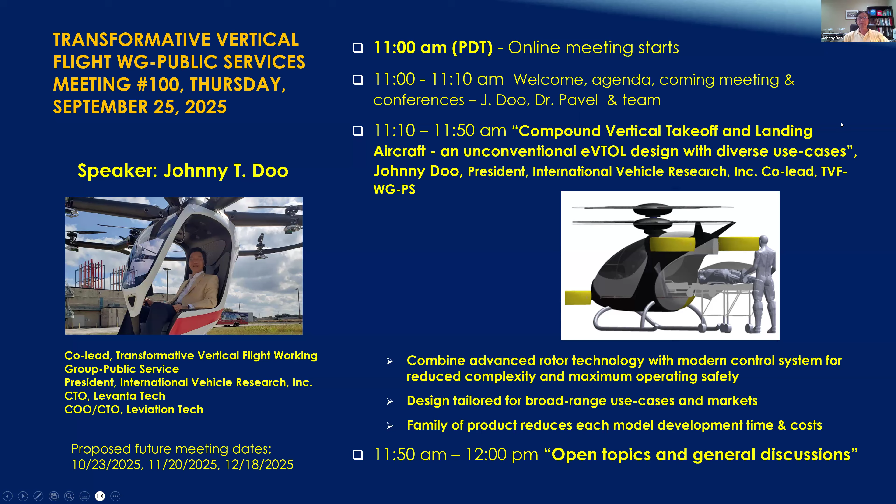There's an Asian Australian Rotorcraft Forum in India coming in November. We have the Vertical Flight Structure and Survivability Technical Meeting, which is a virtual meeting on October 21st and 22nd. There's European Rotors in Cologne, Germany, November 17th to 20th. And of course AirTech, some of you have probably been there, it's in Germany, October 22nd and 24th. There's another one in December in Thailand, the Third International Conference on Advanced Air Mobility Systems.

The important one, make sure everybody puts this on their calendar and makes travel plans: the Transformative Vertical Flight 2026 in San Jose, coming up January 27 to 29, 2026. And I think we have another meeting.

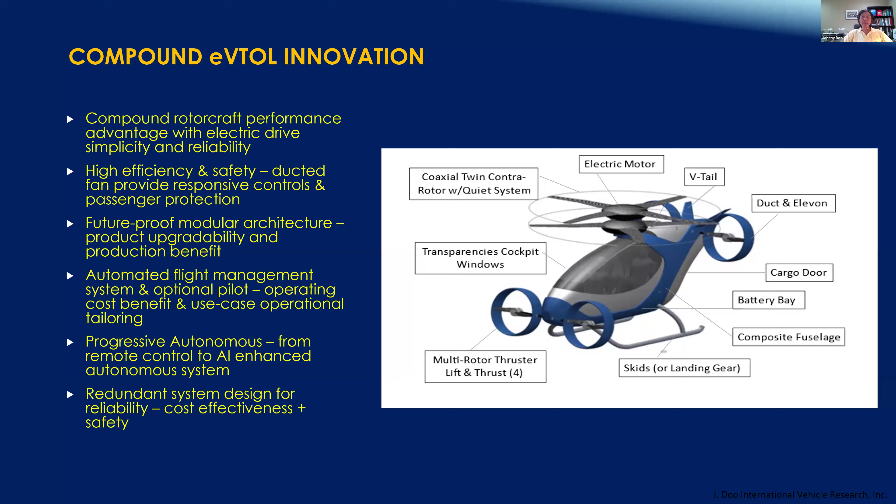I'm not going to read through all the details, but overall, the main rotor is not that big in diameter. There's a reason for it: transportability for missions like first response and disaster relief.

We liked it, for the two-seater version, to be able to shove into a cargo container, ship it anywhere, put it out and fly away. Because of the size limitation, the design can also be put on a trailer and towed wherever we need to deploy it. That's one reason for the smaller main rotor diameter.

We also use a bigger chord, so we're able to generate the lift we need at a lower tip Mach number, controlling overall airborne noise, which in some operations is noise-sensitive and critically important. So it's a balancing act in the design.

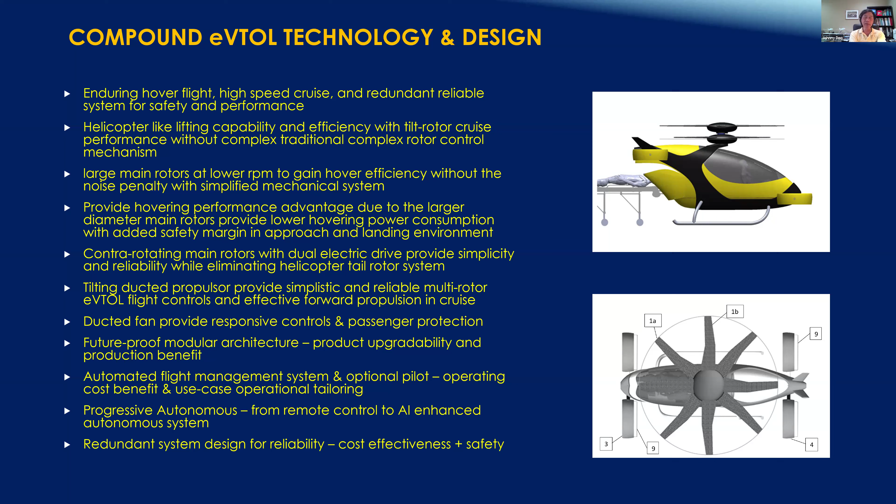I wouldn't say this is the perfect design, because all design involves trade-offs, but it's trying to tailor for better hovering capability and efficiency. For missions where we need to hover to pick up people in water, this may be a bit better. It's definitely not as good a hovering machine as a traditional helicopter—I'll never claim that—but it's in between in functionality and capability. For certain use cases, this may be a viable configuration.

Of course, we try not to design just one. We've laid out plans for at least 3 different sizes. Using seating capacity as equivalent, it's a 2-seater, 4-seater, and 6-seater, leveraging similar technology, concept, and systems. Hopefully the flight control technology developed for the 2-seater will carry over to the 4 and 6-seater with limited modifications.

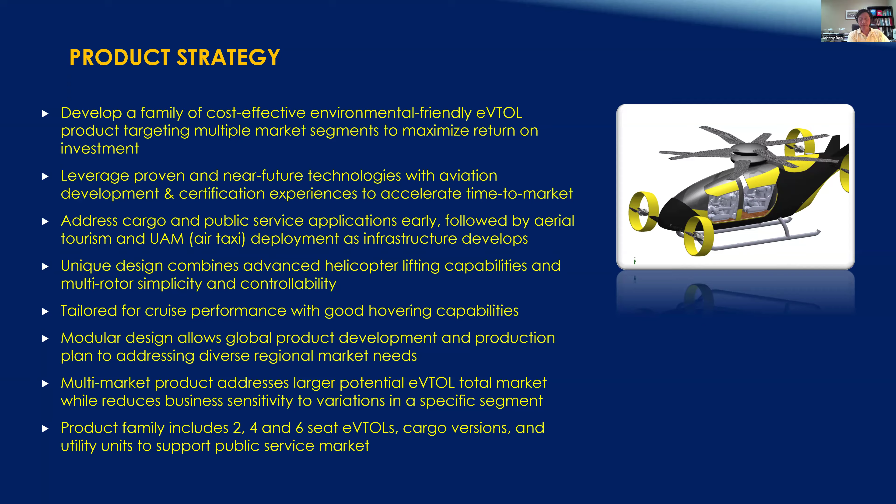And it took a while, but finally got the patent approved by the U.S. Patent Office. That was a learning experience for sure.

Some of the features we try to incorporate into the design, we think it's kind of important: it's a multi-purpose vehicle. It can be passenger carrying, air ambulance, firefighting, cargo transport, tourism. We think if we incorporate those capabilities early stage, we're able to respond to the market demand properly.

And it is environmental friendly. It's designed to be all electric battery. The battery is at the bottom of the fuselage. Actually, there's intended to be a layer of stainless steel sheet at the bottom between the battery and the passenger cabin, kind of borrowing the concept of a standard firewall design on the aircraft certification aspect.

And the battery is removable, modular, removable. Doesn't mean we have to do that every flight, but in case of an emergency response out there in the disaster field, removable battery, even though it adds some weight, makes service maintenance easier, and we can pull it out, charge it up on site, and shove in new ones, so the turnaround time can be a lot faster. So that's a trade-off in weight, a little bit of complexity, and turnaround rate.

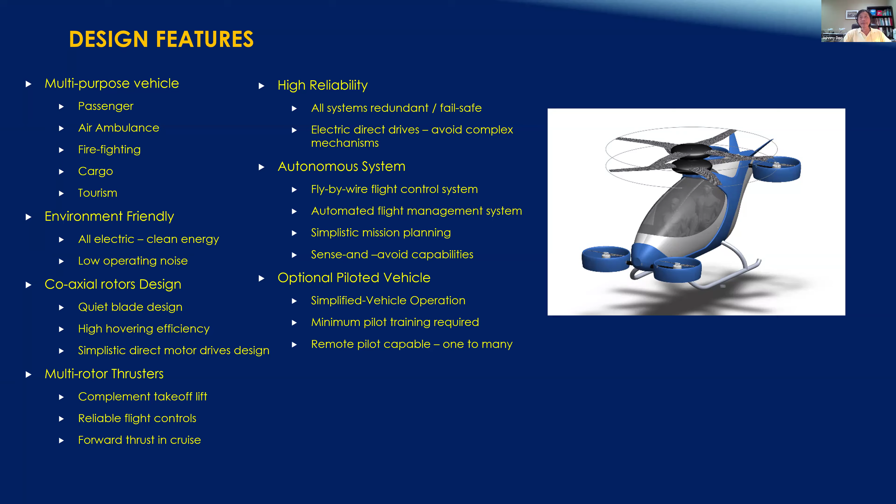But if you look at the size of the vehicle, it's intentionally made compact so it can get in and out within urban streets, landing in a 4-lane intersection, whatever. If we have a problem that needs to get people to the hospital, we can land in small openings and pick up a firefighter, retrieve them to a safe zone. So we think there's some benefit if we can keep the overall operating size small and compact, making it more transportable and deployable.

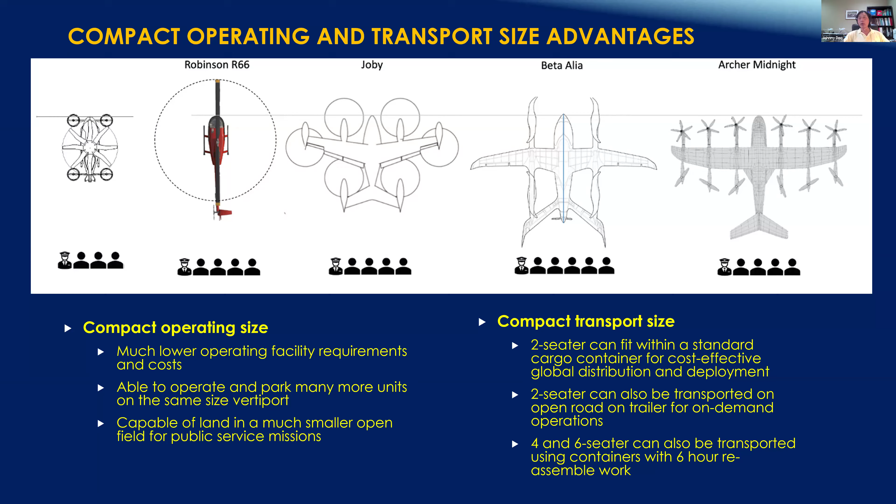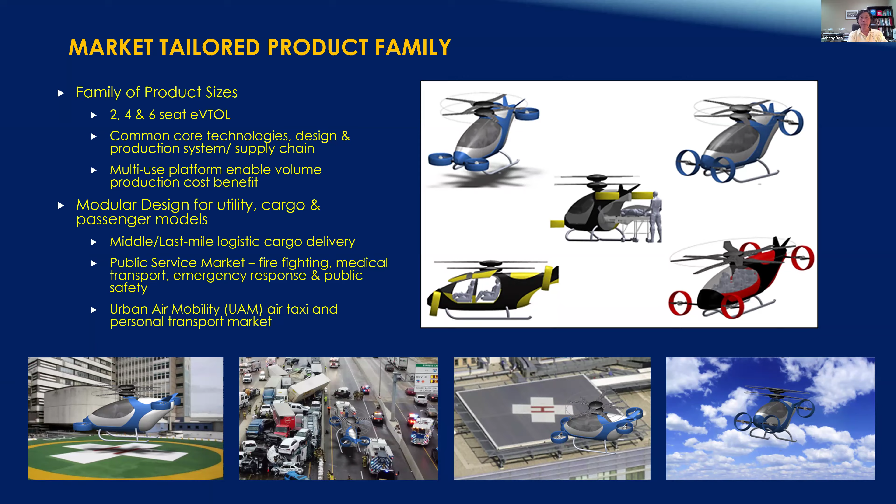And as I mentioned, we try to make it able to accommodate different missions. Obviously carrying people goes without saying, but it can also carry a medical transport patient, or land on the side of the road at a traffic accident so somebody can get to the hospital or care center as soon as possible. It's not big enough, especially the 2 or 4-seater, to perform the same medical transport as some fully equipped medical helicopters. It's not intended to replace those, but rather to fill a short-range, on-demand, quick response time type of mission.

I know we already can get a safe enough, fully protected battery system better than that, so you have to bear with me that this is, performance-wise, a pretty conservative number. And as battery technology continues to enhance, and safety continues to enhance, the number will just keep getting better.

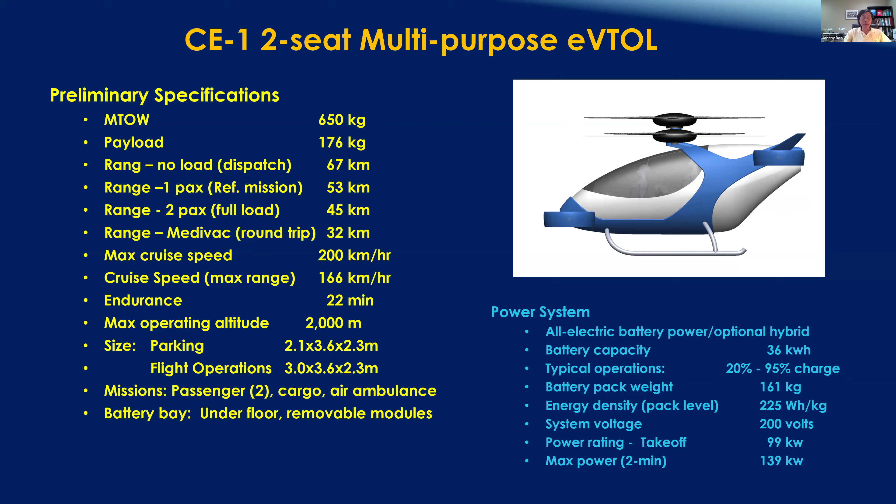And that's one of the benefits of the removable battery modules. As the battery cells and packaging get better and better, we don't have to completely redesign the aircraft to take advantage of it.

And this is what the 2-seater looks like, the most left-hand corner. The thrusters are facing up. It's almost like flying a drone, with 70-80% of the lift taking care of by the main rotors, controlled like a drone, like a quad rotor. In cruise flight, the thrusters are tilted to 80-90 degrees, so most of the thrust comes from the thrusters, not from the main rotors, and the vehicle flies level. You don't operate it like a helicopter, you don't need to tilt the nose down to fly forward - the thrusters take care of that.

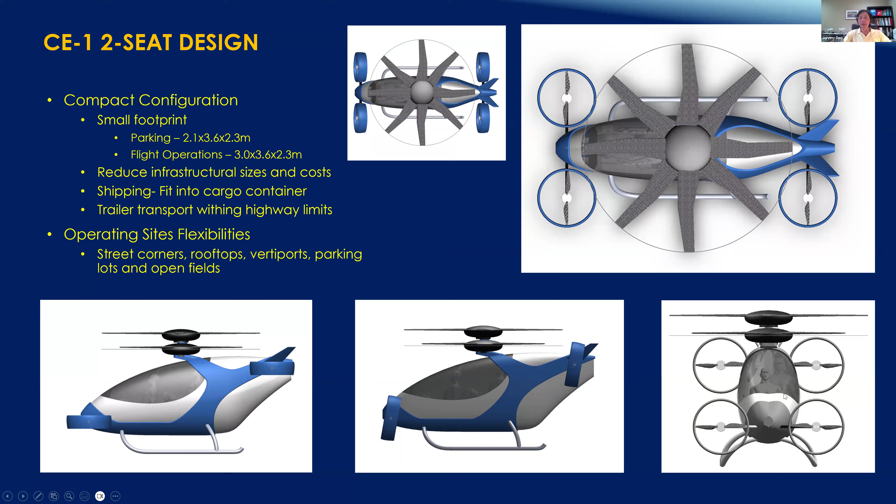And the seating on the two-seater is slightly offset. One reason is it keeps the vehicle small and gives the second row seat a little more legroom. There's another reason I'll show you a little later.

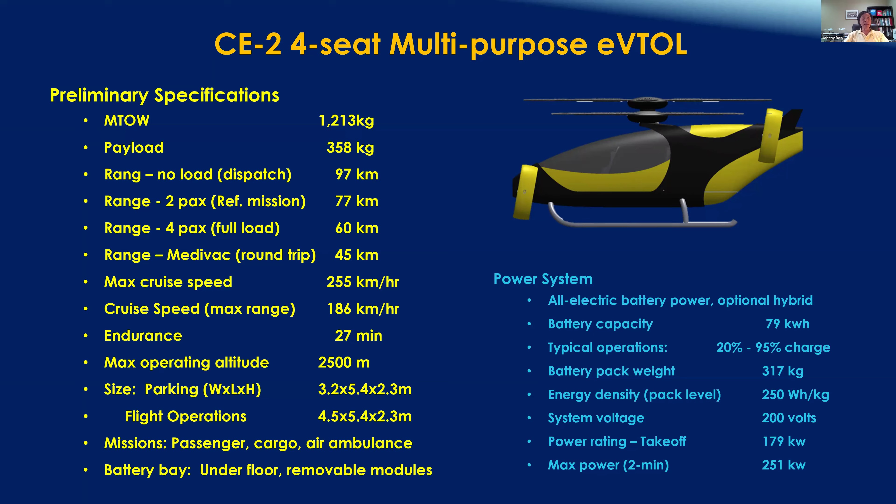Here's a four-seater sized preliminary spec. It has a little bigger battery, double the battery size, and the calculation is based on a 250 watt-hour per kilogram battery system, based on the expected timeline of development. And that's again what it looks like - the seating is a very conventional four-seat, two in front, two in the back.

The door is actually one of the harder things, and I knew that from my aircraft design background - doors are pretty difficult to design. You want it to be light, you don't want it to twist in the wind, you don't want it to flap open, you don't want it to hit the main rotor. And yet when you close it, you want it to feel like a Mercedes door, with that solid feel. I have to admit that's one of the challenges we have, and I think it's probably true for most airplanes. It's a door system, and you want people to be able to get in and out comfortably without crawling difficulties and so on. Anyway, just a little side note.

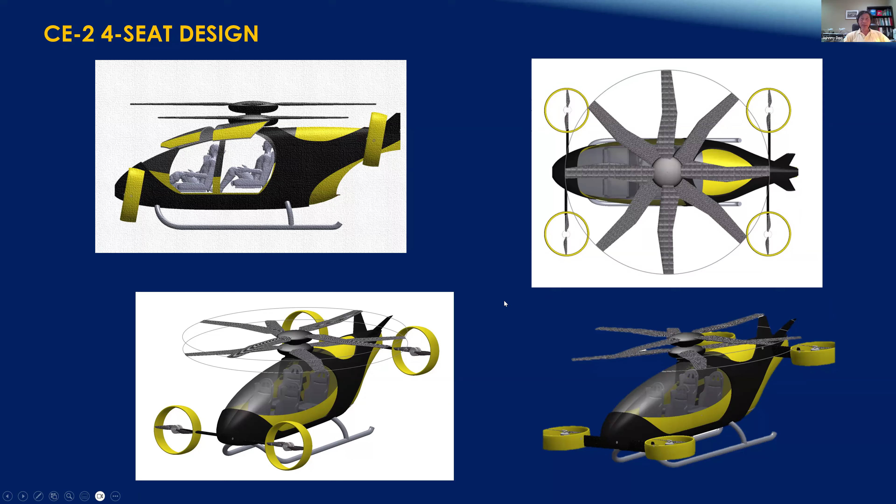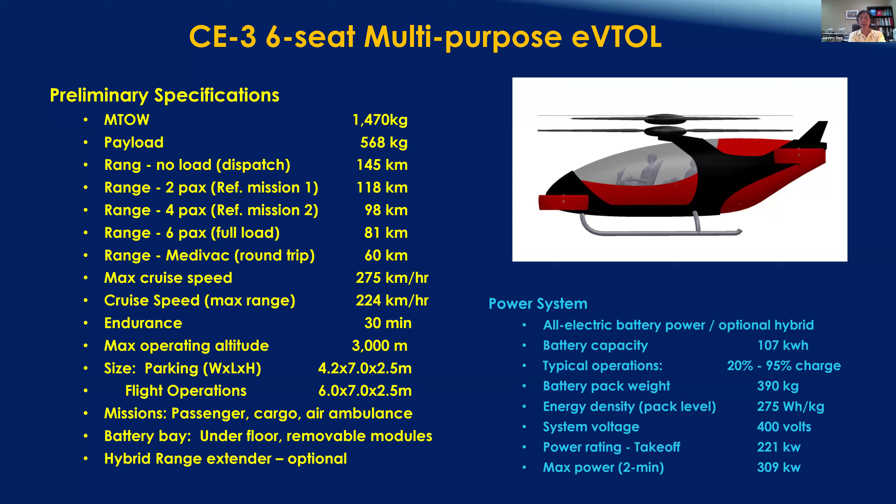And this is the sizing of a six-seater. Again, it doesn't have to be seats in there - it could be carrying cargo, carrying other things, it could be better equipped as medical transport and so on. But it's just bigger, with even better battery systems.

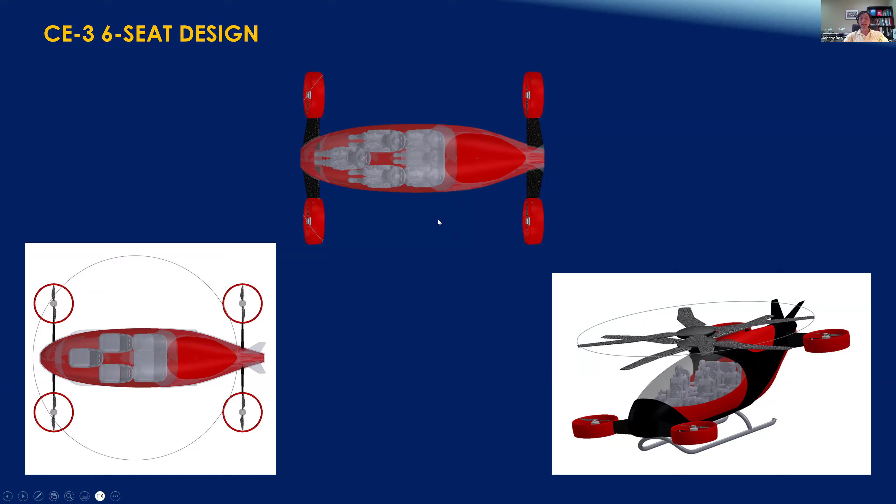And that's what it looked like. The seating is a little bit different - one seat in the center in front, side-by-side seating with space in between, and then three-abreast seating in the back. Of course, kind of like most SUVs, you can fold the back seat down. The back side is where the baggage bay is - I'll see if I have a picture later to show what that looks like. But that's where baggage goes in from the back. If the third row seat is folded down, now all of a sudden, if you're going to the airport for a long trip, you're going to need a lot more baggage space, based on my personal experience.

As for the typical timeline, how many years it would take - I won't say this as a guarantee, but it will easily be 5 years, even with programs today, with the industry better developed than when we started 10 years ago. I think the timeline can be more compressed than for some early starters because of better supply chain development, better technology, better certification experience, and so on. That may be famous last words, but that's a possibility.

One important part of what we're trying to do is look at all the required steps and process to take it all the way to product delivery and design. I keep saying the system will be designed for producibility, for certification, for operation and service maintenance - making sure those are incorporated upfront so that the downstream process will be much easier, and in-field operation will be more practical, more usable, and the operator will be happy with it.

Right now we're just in the prototype quarter-scale proof of concept modeling and testing. I'll admit that one time we overpowered the main rotor, and it turned out to be way too sensitive in our control loop, so we had other than a perfect landing - let me put it that way.

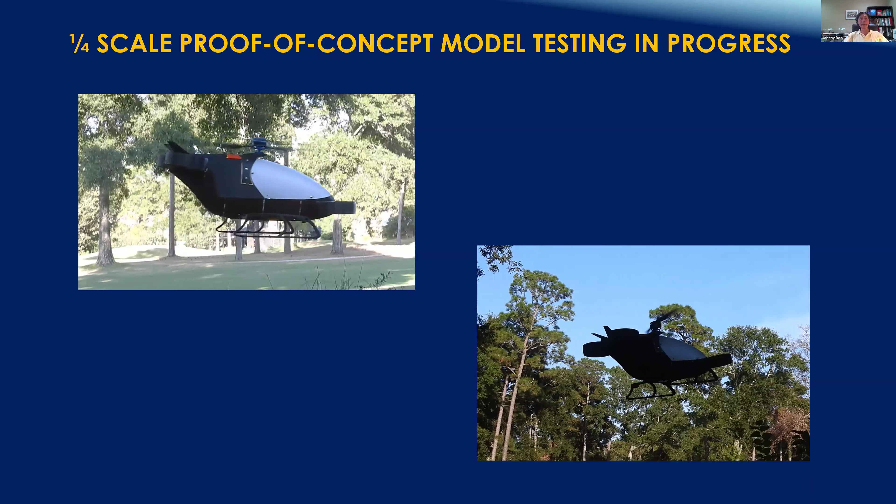Some of the use cases we briefly mentioned: cargo logistics, medical transport, aerial tourism, urban air mobility. We always think that's going to be a large market in the medium and longer term. And of course, a critically important application will be firefighting emergency response, that's dear to my heart, and some related topics about eVTOL for public services. There are 6 SAE Edge reports that talk about different use cases and challenges and what else needs to be worked on. Anybody interested in digging into this, if you want the link, let me know and I'll send it to you.

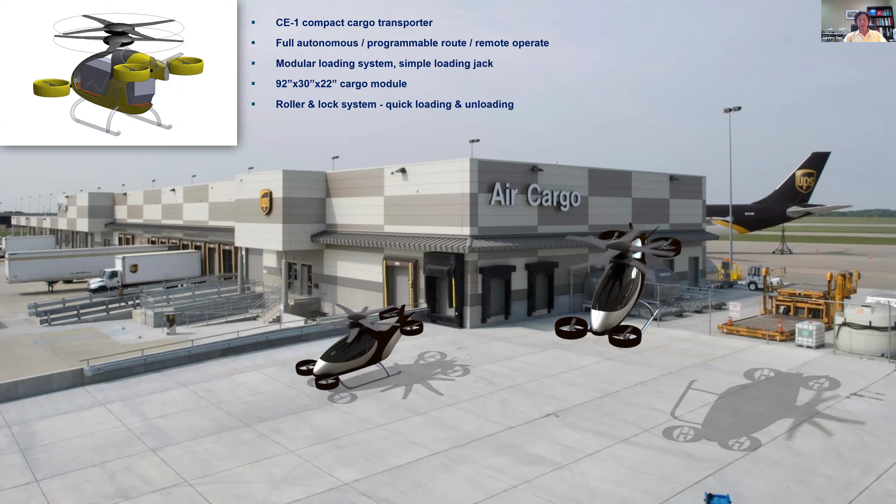Because of the size, the current design is such that you can put the front seat in the normal position, and because it's slightly offset, there's enough room on the side to fold the stretcher vertically sideways. So you can carry medical personnel or a first responder on board to the scene or location. Take a car accident for example: somebody can ride this to the scene, stabilize the patient, put the front seat forward, put out the stretcher, load the injured person, and shove it right in — it fits in the space we've allocated.

Close the back door and push the button. It flies and takes it directly to the selected, closest, or best-suited medical center to be treated. And that's basically some of the key sizing parameters that went into the two-seater design.

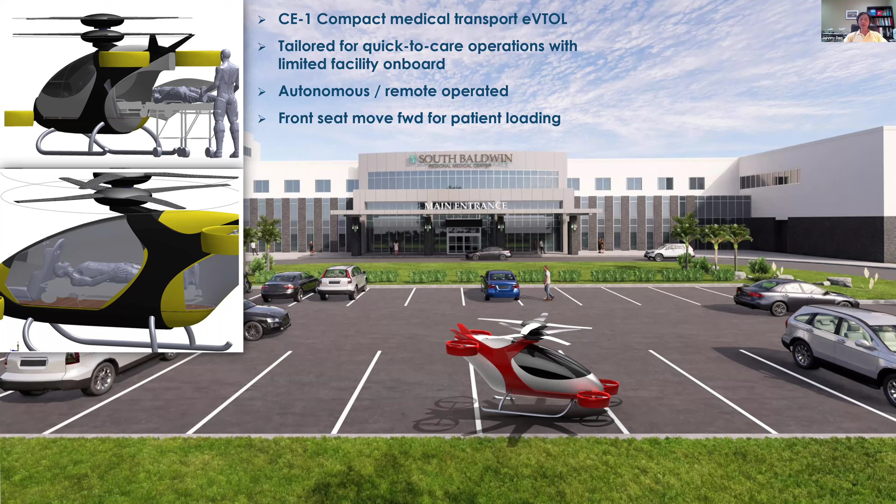Because it's so small, if we superimpose it onto a parking lot, anywhere you have 2 or 3 parking slots, you can probably land this thing. And looking at some fire stations, many of them could probably reinforce the roof and be able to land on the rooftop, or land on the ground. Many fire stations have a piece of land on site that we could easily turn into a landing pad for an eVTOL of this size.

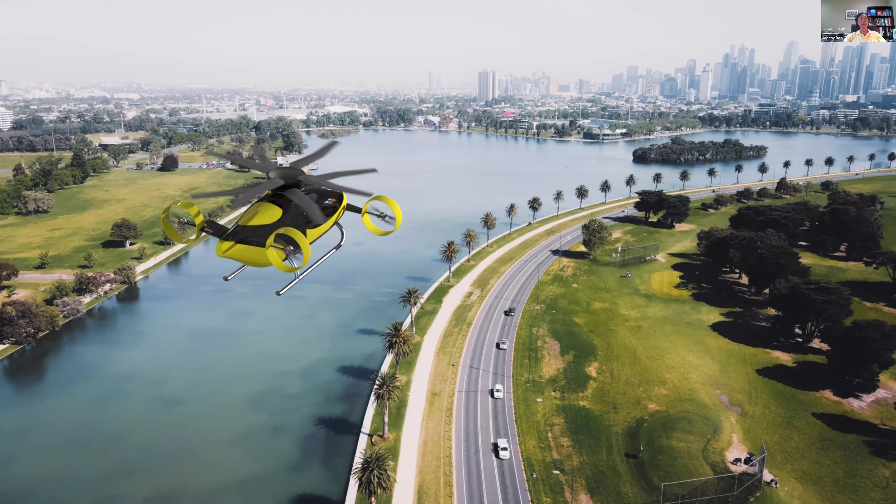Now I'm going to switch topics briefly. This is a global disaster rapid response network. I've been working on this for more than 10 years, still working on it. This is a map of high-risk disaster zones.

What I've been proposing is a large wing and ground effects network positioned at several selected locations, pre-positioned and preloaded with food, water, medicine, response vehicles, and so on. We can cover most of the global disaster-prone areas, gathering the standby team and getting the flight ready to go. In many cases, probably 12 hours. In absolutely anywhere around the world, within 24 hours. That's the goal.

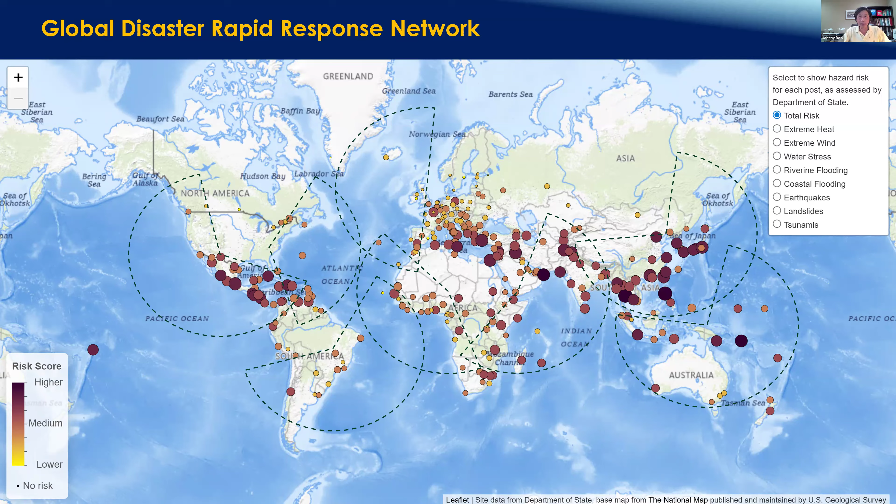And that is the design concept. It's a medium-large wing and ground effect machine, with a 430-ton max takeoff weight, but it can carry 120 tons of payload.

It's sized so that current or near-current technologies, the power plant systems, thrusters, battery systems, can be used. This is a hybrid system. Just battery ain't gonna hack it. It's really powered by turbine aircraft, but it is sized and designed to be producible. It can be developed, it can be done. It's a practical proposal, hopefully.

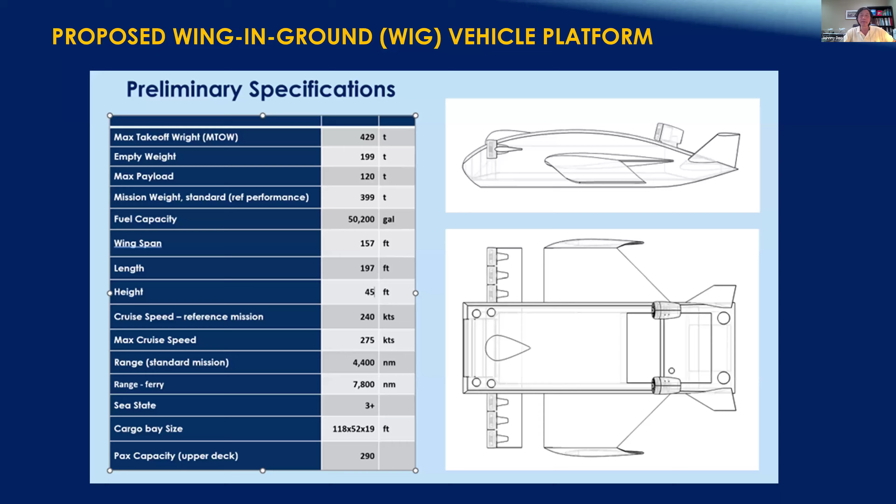That's what it's going to look like. It can come in and land in the water. And you say, what does this wing-in-ground-effect vehicle have to do with the eVTOL we're talking about? That's what it is, because once you get there and land in the water, you can launch a hovercraft from the front, deploy a helicopter or eVTOL from the back, and this thing can be floating in the water as a command center.

It has an onboard hospital on the top deck, and the vehicle can come in and back and forth, bringing food, water, and medicine to the disaster area and bringing injured people back and forth. This is more of an illustration of another one coming in.

And the back end opens up and becomes a flat deck. If you look at where the eVTOL has landed on the flat deck, you offload the patient and go straight in, and there's the hospital right in front. As illustrated here, the eVTOL can go back and forth.